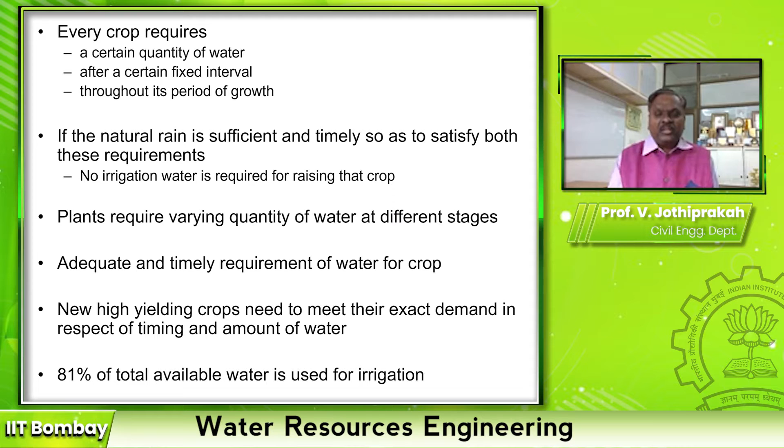We work towards this irrigation engineering because 81% of the total available water is used for irrigation. Especially in India also, it is around 80 to 82% supplied for irrigation. Why do we need to supply this in spite of having an average rainfall of 1150 mm per year? Because the natural rainfall is either insufficient temporarily or it's not happening at fixed intervals.

Depending upon the average annual rainfall, areas are climatologically classified as arid, semi-arid and humid. Our country has different classifications starting from arid to very wet, because we have annual rainfall varying from 200 mm to 11,000 mm. When the area receives annual rainfall less than 500 mm, we call that an arid region. When it is between 500 to 1100 mm, it is semi-arid.

At an average, our India comes under semi-arid condition. There are certain areas in our country which receive around 1400 mm — we call that subhumid. There are certain regions which receive up to 1700 mm — they are called humid regions. There are certain regions in the Western Ghats which receive around 2000 mm — that is wet region, and there are very high areas receiving more than 2000 mm — we call that very wet region.

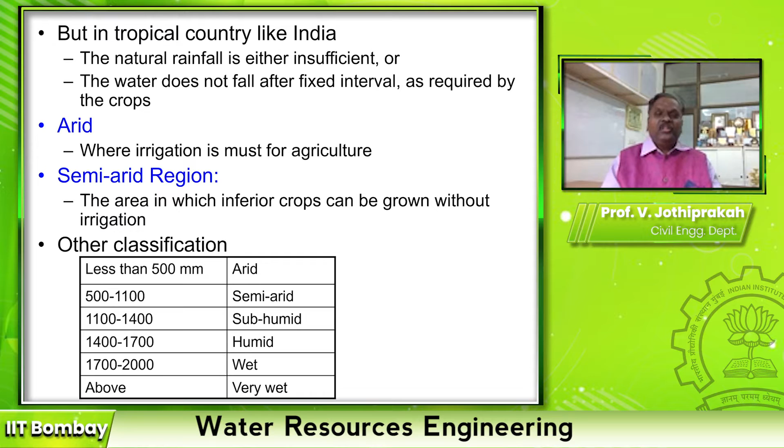So we used to supply irrigation water from arid to humid regions. But in our country, we supply irrigation water in all the classifications, because even in the western region where we receive rainfall up to 2000 mm, it happens only in the southwest monsoon. The remaining period of the year we need to irrigate. How much to be irrigated, and the frequency? If there is no irrigation...

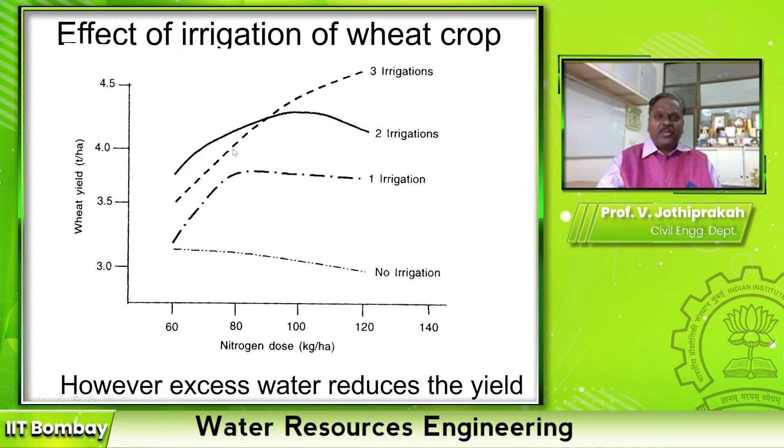This is the relationship between the yield of wheat crop and the nitrogen doses depending upon the number of irrigations. Even though nitrogen doses are available, if there is no irrigation, the yield is very less. When there is one irrigation, there is a good yield. When there is two, it's optimal. When you irrigate more with more nutrients, the yield may increase. If the nutrients are very less, the yield will be very less. So more water or less water, your yield will be less — you need to supply an appropriate quantity of water.

This is a picture from FAO. That quantity of water is called crop water requirement or water requirement of a crop. It is the total quantity and the way in which a crop requires water from the time it is sown to the time it is harvested — that is called the irrigation period.

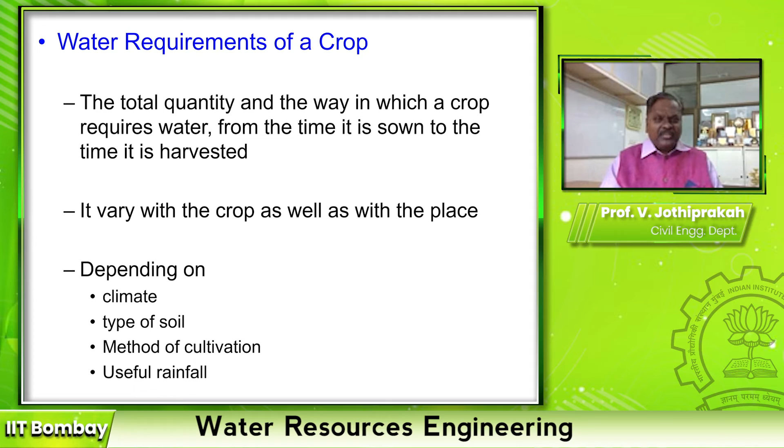This irrigation period varies with the crop as well as spatially from one place to another, depending upon the climate, the type of soil, method of cultivation, and useful rainfall.

So we have certain words which we need to remember in irrigation engineering. The first one is crop period. Crop period is the time period that elapsed from the instant of its sowing to the instant of its harvesting.

But the base period is the time between the first watering of a crop at the time of its sowing to its last watering before harvesting. So base period will always be less than crop period, or at most equal to it. That's why people say crop period is slightly more than the base period, but for all practical purposes, they are taken as one and the same.

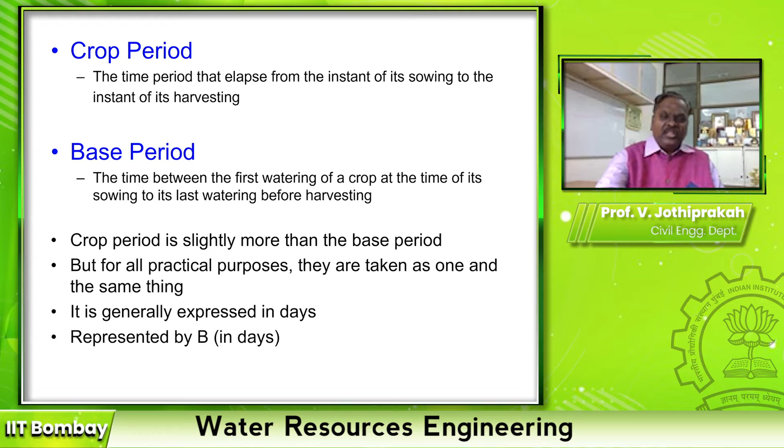It is generally expressed in days. So base period is expressed as B in irrigation engineering.

Delta is the total depth of water that should stand on the irrigated area if the total quantity supplied must stand above the surface without percolation. That means you are estimating evapotranspiration, right?

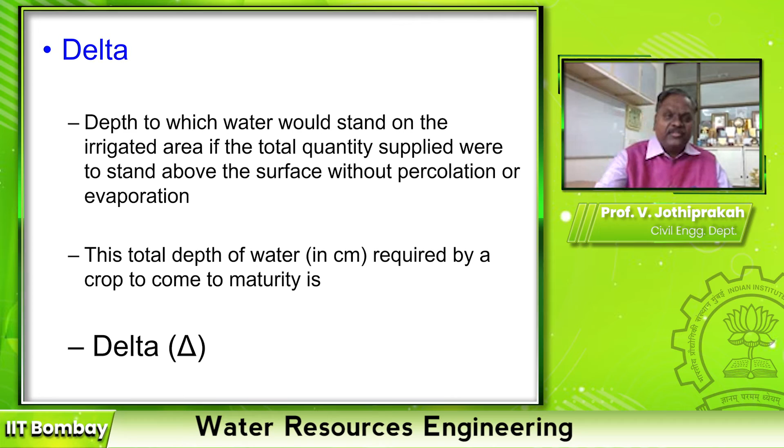That has the unit of centimeters per day. If that is the depth of water per day for the entire crop period, how much depth is required by the crop? You go on adding it throughout its base period, and it becomes centimeter depth, which is called delta. In other words, delta is the depth of water required by a crop throughout its base period for its metabolic growth without any deficiency.

For example, we have solved a problem. If rice requires about 10 centimeter depth of water at an average interval of 10 days, and the crop period is 120 days, find out the delta.

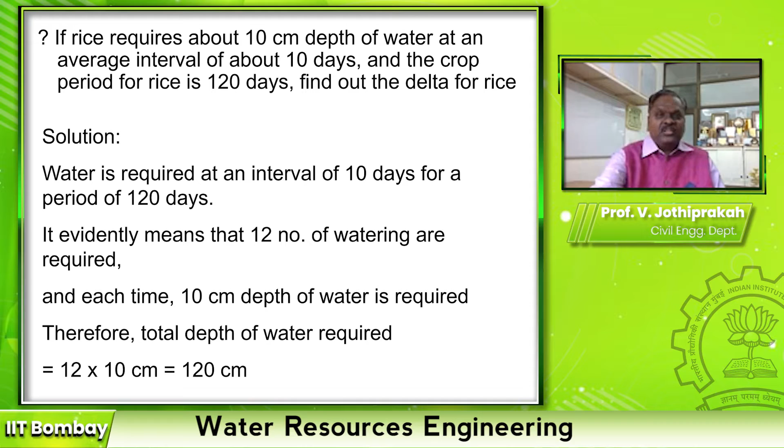So we are going to irrigate every 10 days, and each time we irrigate 10 centimeter depth of water. Out of 120 days, how many times do we irrigate? It is 12 times. So 10 centimeter into 12 waterings equals 120 centimeters. So the crop requires 120 centimeters of water throughout its crop period. This is how we estimate the delta and base period.

But this is a sample delta for different crops grown in India. Common sugarcane is a 1 year crop. For 1 year, the total depth of water to be supplied at the root zone is 90 centimeters. This is an average.

Similarly, rice, which is only a 3 to 5 month crop, is 120 centimeters. Tobacco, a 6-month crop, requires 75 centimeters. Garden fruits and cotton, also 6-month crops, have a delta of 50 centimeters. Vegetables, 4 to 6 months, are also 45 centimeters.

Wheat, 40 centimeters, which is 3 to 4 months. Barley, 30 centimeters. Maize, a dry crop, 25 centimeters. Fodder is 22.5. So the delta depends upon the type of crop.

Out of all these crops, rice and sugarcane are called irrigated wet crops. All other crops are called irrigated dry crops. That means for rice, we need to keep the water level above the ground level, so there is always a saturated condition. That's why it is called irrigated wet crop.

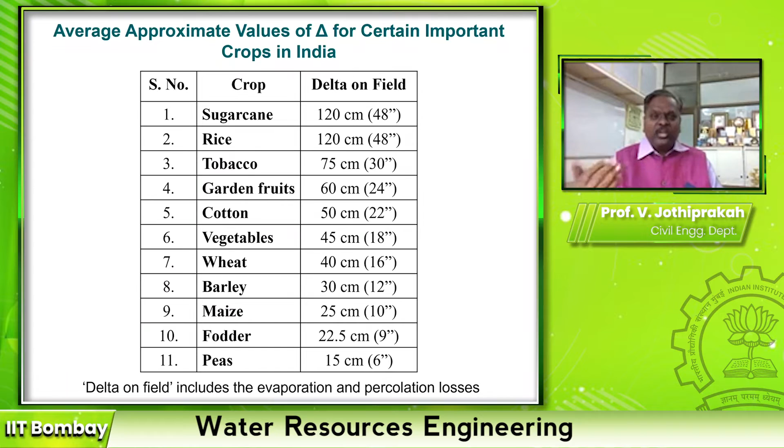Whereas for all other crops, once the soil is 100% saturated, you stop the irrigation. Then you allow a certain time period until the water in the soil is taken up by the plants, and then you irrigate again. So the frequency is more for other crops, whereas it is very less for rice crop.

Then if I want this much depth, how much water do I have to release from the dam? That's the major requirement of a water resources engineer. Okay, this much depth is required, then how much do I need to release? That is called duty.

So duty is the relationship between the volume of water and the area of the crop it matures. Duty is nothing but a unit discharge flowing for a time equal to the base period of the crop, called the base of the duty. That means duty is defined as the area irrigated per meter cube per second of discharge running for a base period of B. That means if I release 1 meter cube per second from the dam gates for a crop period B, how much area can I irrigate? That is called the duty.

For example, if water is flowing at a rate of 1 meter cube per second and runs continuously for B days of crop period, and matures or irrigates 200 hectares, then the duty of the water for that particular crop is defined as 200 hectares per cumec. That means 1 meter cube continuously supplied will mature 200 hectares. That is called the duty of the crop, and it varies from crop to crop.

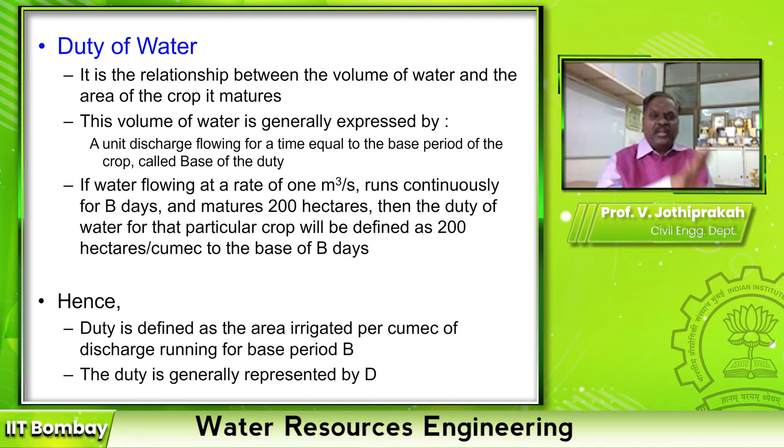There is a relationship between duty, delta and crop period. Let the crop base period be B days. Let 1 meter cube per second of water be applied to this crop on the field for B days. How much volume of water is applied for B days? Convert B from days into seconds since the rate is 1 meter cube per second. So the volume of water supplied along this crop period of B days is B into 24, converted into hours, then into 3600. That is the unit conversion. So the volume of water supplied from the dam is 86,400 B, where B is the days, in meter cube.

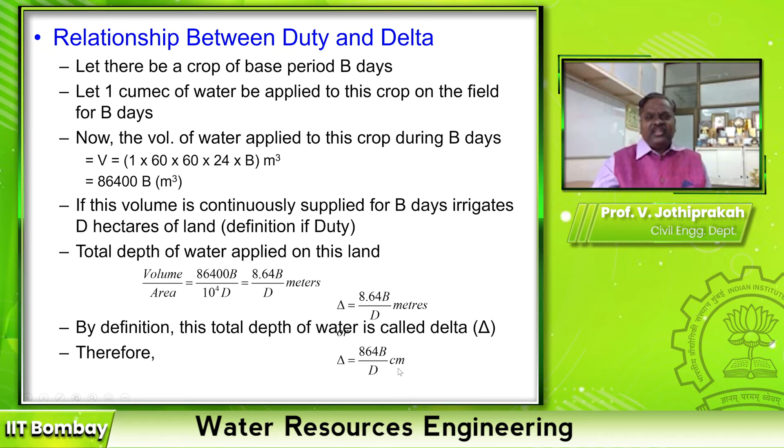If this volume is continuously supplied for B days, it irrigates D hectares of land. So the depth of water is equal to volume per area. D is in hectares, which equals D into 10,000 meter square. Volume is 86,400 B, and area is 10,000 into D. So volume per area is nothing but delta, which equals 8.64 B by D. By definition, this total depth of water is called delta. Therefore, delta is 8.64 B by D if delta is in meters, or 864 B by D if delta is in centimeters. This is the relationship between duty, delta and base period.

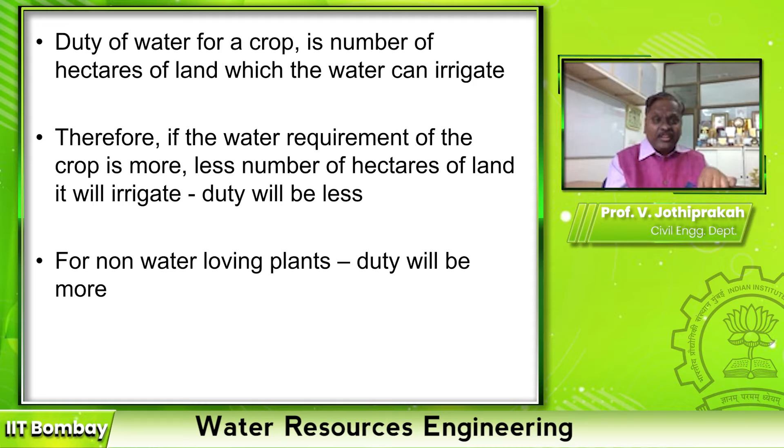Duty of water for a crop is the number of hectares of land which the water can irrigate. Therefore, if the water requirement of the crop is more, less land will be irrigated, so duty will be less. For non-water loving plants, duty will be more. That means for irrigated wet crops like paddy and wheat, with 1 meter cube per second you can irrigate only a small area. But for irrigated dry crops, for the same 1 meter cube per second, you can irrigate more area.

A simple problem: find the delta of a crop when its duty is 864 hectares per cumec. Please remember the unit for duty is hectare per cumec, or hectare per meter cube per second. Find the base period, find the delta if the base period of this crop is 120 days. So delta equals 864 B by D, where delta is in centimeters, B is in days, and D is in hectares per cumec. Substituting directly, you get delta as 120 centimeters.

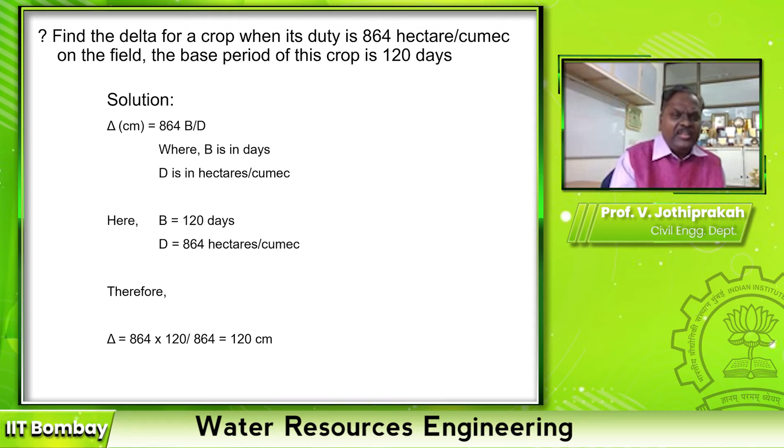As a water resource engineer, we are more concerned about this duty. That means you will receive an instruction to release a certain amount of meter cube per second from the dam. This duty depends upon various factors. Some of the factors are type of crop, whether it is irrigated dry crop or irrigated wet crop, and at what location. So duty will be less for a crop requiring more water, and vice versa.

Climate and season matter too. The same crop in the same place, during southwest monsoon, will require a certain amount of duty; during northeast monsoon, it will require a different duty; and when growing in summer, the duty will be different again. So duty includes water lost in evaporation and percolation, which vary with time, season and climate, and it is also a function of useful rainfall. This useful rainfall is different from observed rainfall as well as rainfall excess, which you have studied in precipitation.

Rainfall excess is nothing but the rainfall over and above the losses. But in this case, useful rainfall is: if there is X quantity of rainfall and you have only Y quantity of evapotranspiration, not all rainfall is considered by the crop for its direct growth. It will take only a certain percentage of rainfall for its metabolic growth, and that rainfall quantity is called useful rainfall.

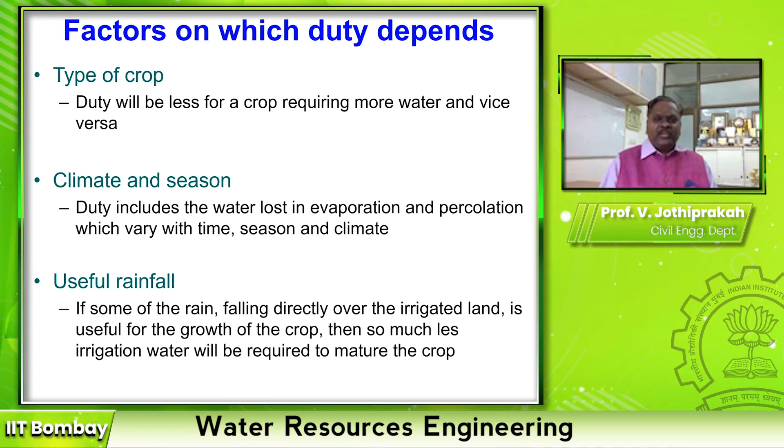If some of the rain falling directly over the irrigated land is useful for the growth of the crop, then so much less irrigation water will be required to mature the crop.

It also depends upon the type of soil, that is, the permeability of the soil under the irrigated crop. If the permeability is very high, you need to irrigate more. If the permeability is very less, water loss due to percolation will be less, so you have to irrigate less. So the type of soil governs the quantity of water to be supplied.

Then there's the efficiency of cultivation method. This is where human intervention helps improve the duty, meaning how efficiently the quantity of water supplied reaches the root zone. There are different methods of irrigation, like flooding method for wet crops, sprinkler method, and drip irrigation. These different methods help improve irrigation efficiency. The more the efficiency, the more the duty.

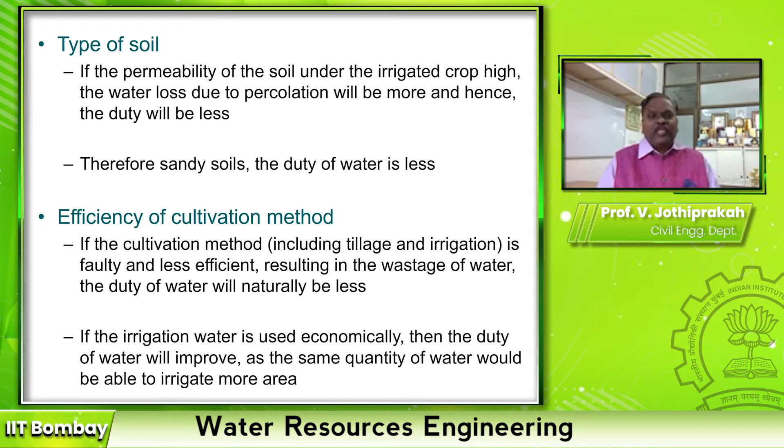So if the irrigation water is used economically, then the duty of the water will improve, meaning the same quantity of water can irrigate more area.

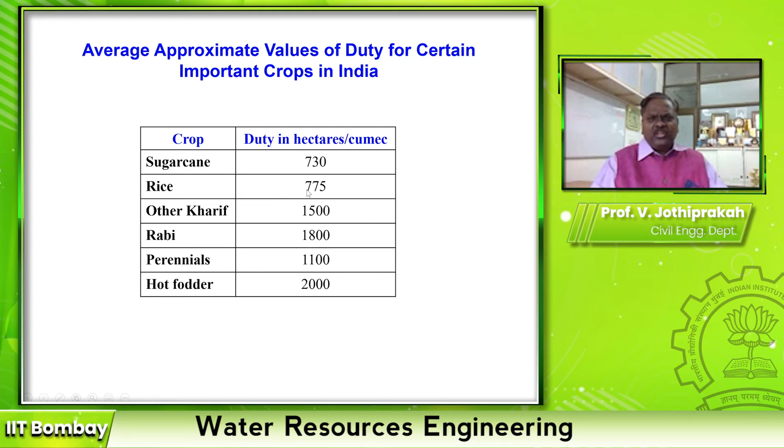The other kharif crops are all continuous annual crops.

Why is duty important? Because the design of the canal system, which distributes water from the dam to the crop, depends upon this duty. The canal is designed for a particular carrying capacity Q, and Q is nothing but the duty of the crop.

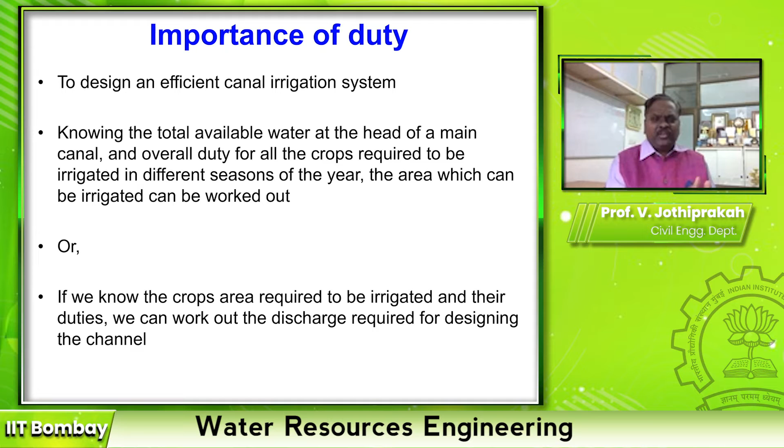Knowing the total available water at the head of the main canal and the overall duty for all crops required to be irrigated in different seasons, the area which can be irrigated can be worked out. Or if we know the crop area required to be irrigated and their duties, we can work out the discharge required for designing the channel.

These are some of the measures for improving the duty of water. As said, the main important factor is increasing the efficiency of cultivation or irrigation methods.

Some precautions: land used for cultivation should be as far as possible leveled, so that the same depth of water is applied everywhere in the field. The field should be properly plowed to the required depth, otherwise water will be stagnating.

If the root zone is very hard, water will not percolate. Whatever water you supply will stand on the ground and be lost to evaporation, while the roots receive no water.

Improved modern cultivation methods like sprinkler and drip irrigation supply water directly at the root zone, thereby reducing several losses.

Porous soil should be treated before sowing crops to reduce seepage. If the soil is very porous, like sandy soil, whatever water you supply will go deeper than the root zone and plants cannot take the water, so you have to treat the soil.

Alkaline soil should be properly leached before sowing, otherwise the alkaline soil may choke, or the alkaline material will be taken up by the plants.

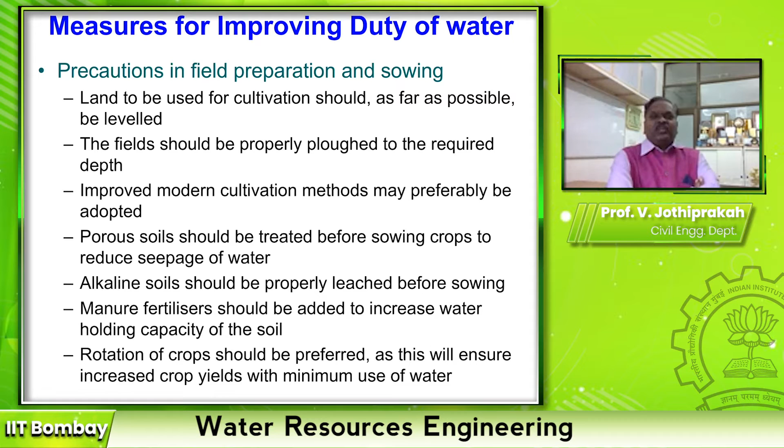Rotation of crops should be preferred, as this will ensure increased crop yield with minimum use of water. These are some measures to improve the duty of water.

There are certain precautions in handling irrigation supplies. The source of irrigation water should be situated within prescribed limits, meaning the dam should not be very far off from the command area.

The canal carrying supply should be lined to reduce seepage losses. Water courses may preferably be lined or made of RCC. The canal network consists of a dam, from which the main canal runs, then branch canals from the main canal, and from branch canals water is taken to the field.

If canals are all lined, then your conveyance losses will be less. Free flooding of fields should be avoided, but for paddy and wheat, you need to do this free flooding.

For all other irrigated dry crops, you can grow with different methods of irrigation like furrow, sprinkler, or drip irrigation. Or there is another method called subsurface irrigation, where you directly take the water to the root zone.

If canals are not lined, then two canals running side by side may be preferred. That will reduce the full supply level, thereby reducing the percolation losses. Altogether, the idea is to use the water economically.

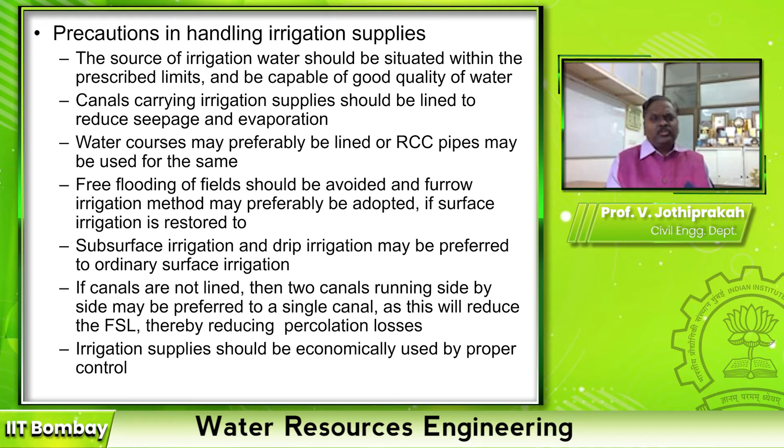Now we'll see what are the crops and crop seasons in Indian agriculture. More than 70% of our Indian population is directly or indirectly connected to agriculture. The major crops called staple food in India are rice and wheat. They are called irrigated wet crops.

Other irrigated dry crops are pulses, all dal which we eat, cotton, groundnut, jute, coffee, rubber, tea, sugar — they all come under irrigated dry crop.

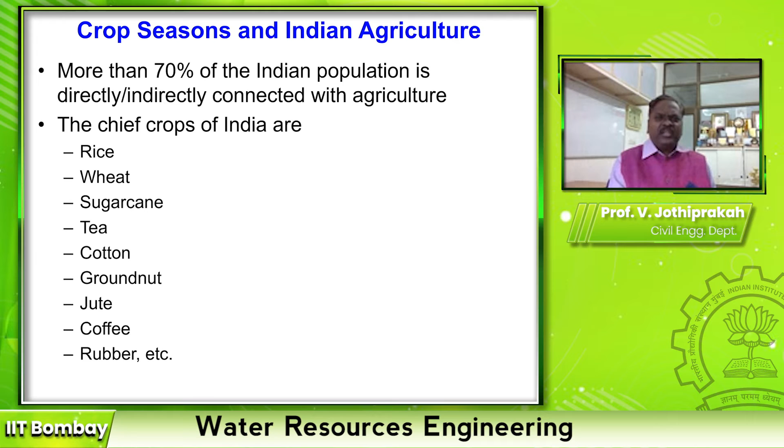I had given an assignment, if you remember during the first class, to write down the different crop seasons in different basins in India. Prior to construction of large dams, each reservoir and each river basin has its own name for its irrigation period.

For example, Samba, Kuruvai, Taladi — this is in Kaveri. Then Kar, Advanced Kar, Pishanam in Thamirabarani. Like that, each and every river basin has its own name.

But now we have only two crops, called Kharif and Rabi seasons. Because all irrigation starts in southwest monsoon, we call that the Kharif period. Northeast monsoon we call the Rabi period. So we have only two irrigation crops now in India, Kharif and Rabi, but still there are certain river basins which have their own crop periods.

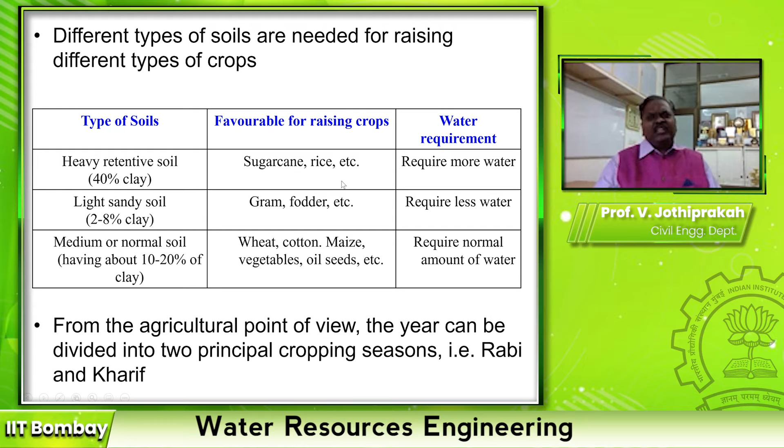So these are some of the types of soil which require different types of water retention, and we can say that the suitability of the soil determines the type of crop that can be grown.

Kharif starts from 1st April and ends on 30th September, the southwest monsoon period. Rabi starts from 1st October and ends on 31st March. These dates are not rigid, but nowadays we normally start only from June.

So June, July, August, September — these 4 months are the Kharif period. October, November, December and the next remaining months make up the 6-month Rabi period. The time may vary by 1 to 3 months on either side.

Sugarcane, which is an important cash crop, extends over both the Kharif and Rabi seasons. There are several reservoirs in India which start operating only from the month of June.

There are certain crops which require 6 months in the field. If the crop period is 6 months, they will extend into both Kharif and Rabi. 50% of their crop period will be in Kharif and 50% in Rabi season. This means they will be sown in June or July and will end in the month of December, so the area is occupied across both seasons.

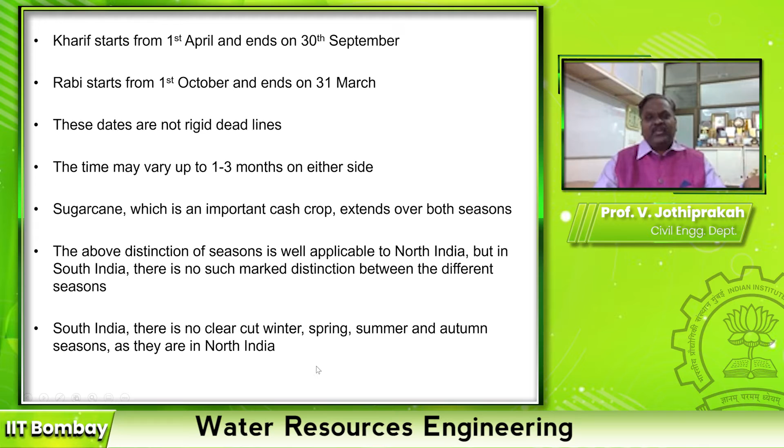The above distinction of seasons is well applicable to North India, but in South India there is no such marked distinction between different seasons — each river basin has its own name instead. You can ask some of the farmers what the season is called, or if you go to the irrigation engineering department of each state, you can find out the name of the irrigation crop period in that river basin.

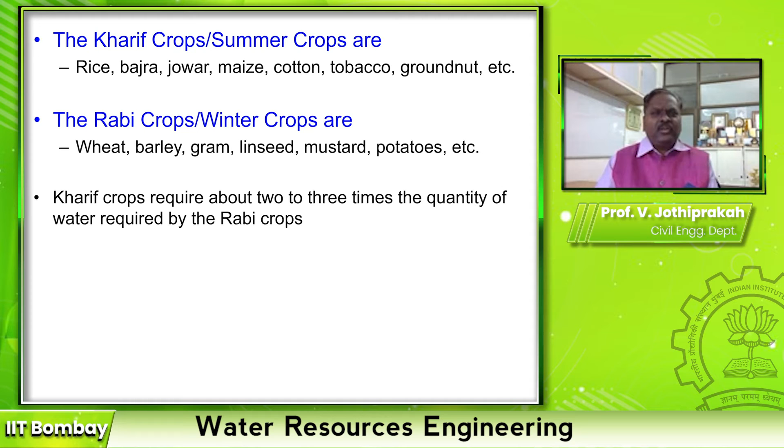These are some of the crops which are commonly grown. Rice and wheat are grown in both the Kharif and Rabi seasons, but the quantity of water required will be different. Kharif season is normally for irrigated wet crops, and Rabi season is generally for irrigated dry crops. Most of the pulses are grown during Rabi, though there are certain crops common to both seasons. Kharif crops require about 2 to 3 times the quantity of water as required by Rabi crops.

Now let us see what are the methods to improve irrigation efficiency — how efficiently we can send water from the dam to the field. From the dam, if water is supplied through the canal network, it will come to the field. So when I apply water in the field, that is called the application method, and depending upon the application method, there are different types of irrigation.

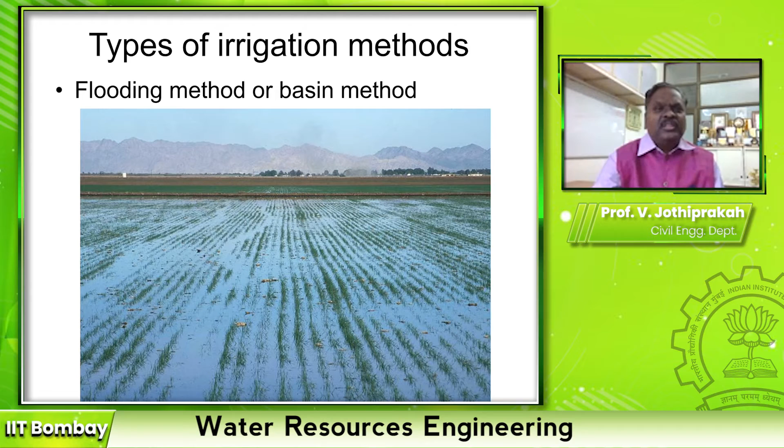The first one is called the flooding method. It's mainly for paddy and rice. We used to irrigate through this flooding method.

This is called the furrow method. Most of the pulses, chilies, sugarcane, and maize are grown using the furrow method.

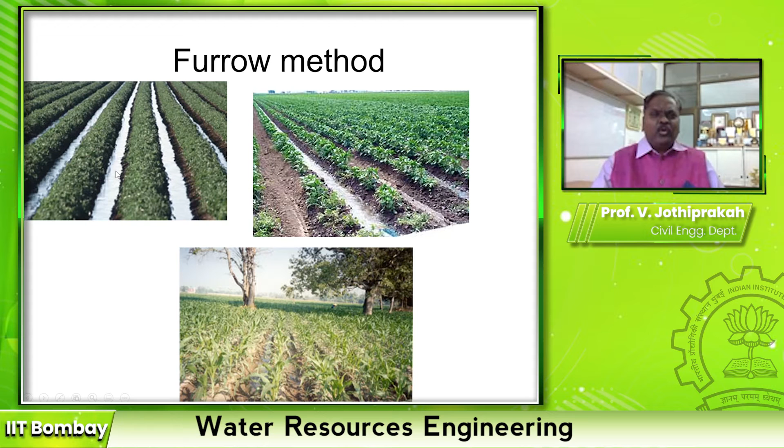That means there is a long, small canal, and water is allowed to flow in these small canals, with a bund used to irrigate the crops. This method has slightly more efficiency than the flooding method.

Then the next method is sprinkler irrigation. Sprinkler irrigation is like a substitute for rain. It sprays water like rain, from a single sprinkler to a group of sprinklers.

The sprinkler rain intensity has to be designed. This intensity is a function of the type of crop and the soil characteristics.

I think you know what infiltration rate is. At any cost, this sprinkler rate should not be more than the basic infiltration rate, because if it is more, once the soil is saturated, it will start overflowing.

So in sprinkler irrigation, there is no flooding or surface runoff created from the field. It will sprinkle like rain until the soil gets saturated. That is field capacity.

Second is crop requirement. If the crop requires a rainfall intensity less than the infiltration rate of the soil, I design it for that. So the sprinkler rate is a function of both the type of crop and soil characteristics.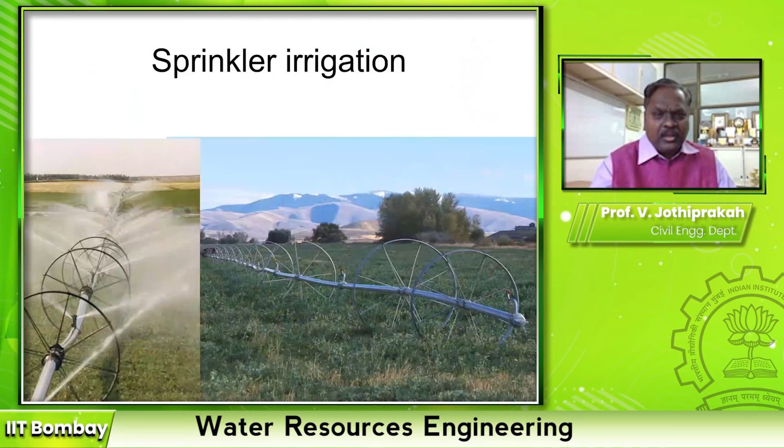This is for irrigated dry crops. The previous one is for fodder crops. This is what nowadays are automated sprinkler irrigation methods for cotton, orchards, and gardens.

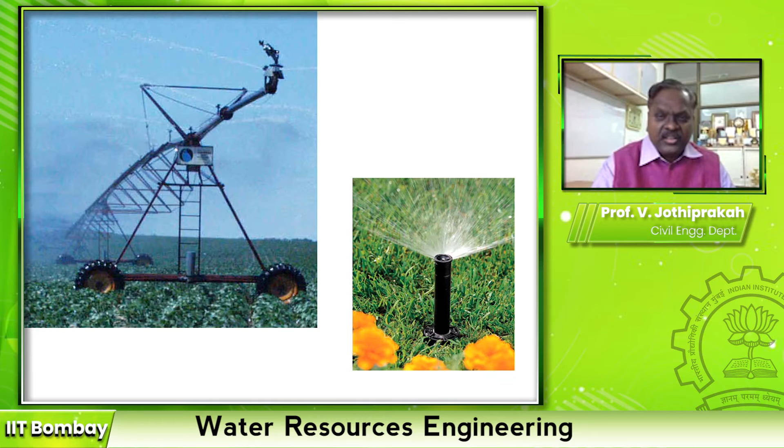This is the close-up view of a sprinkler gun. There will be a jet coming out of a small nozzle which is flipped, splashing the water. Irrigation efficiency-

This sprinkler has an irrigation efficiency of 90%. That means if I supply 10 centimeters of water, 9 centimeters reaches the crop root zone. 90% is the irrigation efficiency.

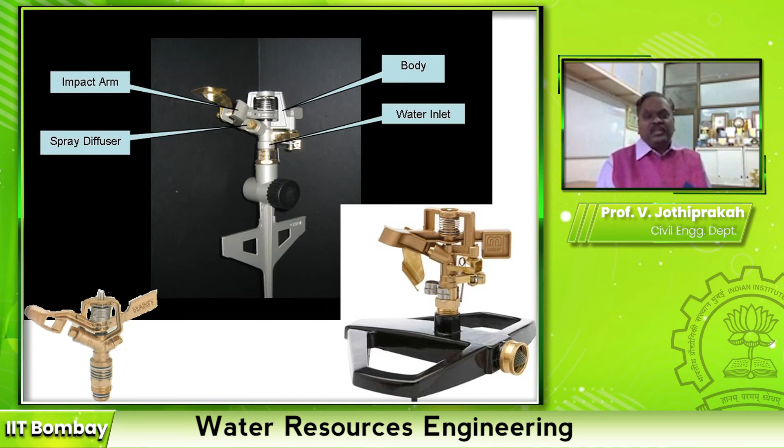There is another method called drip irrigation, which delivers the required quantity of water drop by drop at the root zone, with a very high irrigation efficiency of 95% to 98%, but the initial cost is higher.

So as the method of irrigation advances, the cost also increases, starting from basin, then furrow.

Furrow has to be constructed every year. Its efficiency is better than the basin method. Then sprinkler irrigation requires equipment that is costlier, but it is more efficient than the furrow method.

Drip irrigation is much more efficient than sprinkler irrigation, but you need to invest a lot. All methods, sprinkler can be used for all crops, but drip irrigation, nowadays, is used for-

orchards, row crops, and sugarcane. Now, because of its expense, it's very difficult to use it for all other crops.

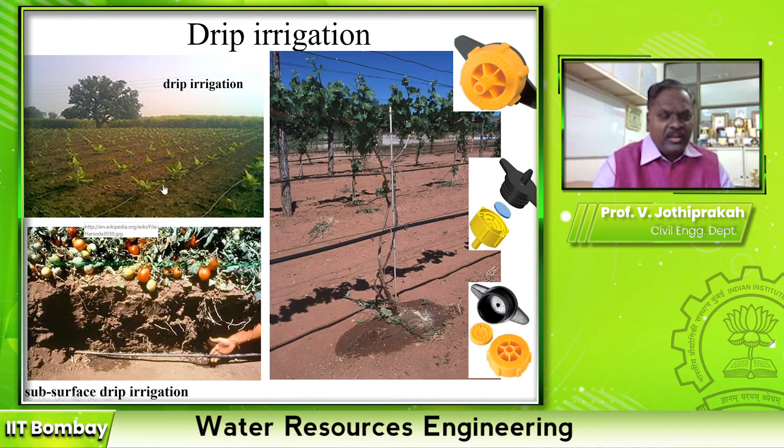So this is mulching to reduce evaporation from the crop root zone, in a conventional drip irrigation system. This is the drip pipeline. We will see this is called the emitter. Every pipe will have an emitter.

It is not just a hole. The water moves around a circular path, so that the head of water and the quantity of water supplied at each plant is uniform.

There will be a main pipe, then sublines, and then emitters. Emitters are the small holes with a circular movement of water. This portion is fixed into the pipe.

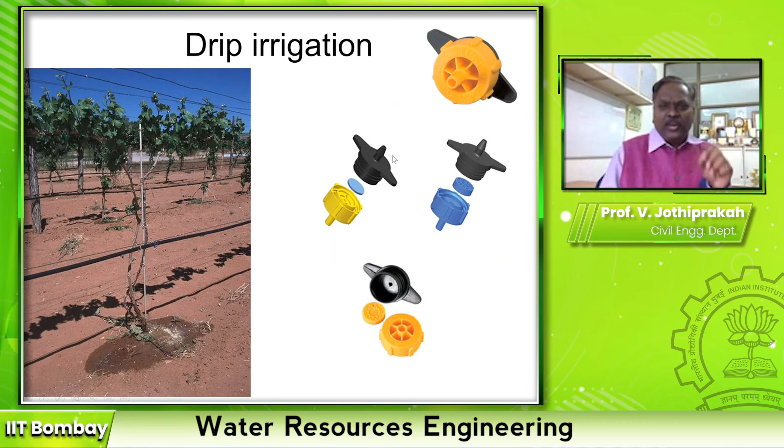Water will come out of this small nozzle drop by drop. Thereby, the head of water available for each crop is uniform throughout the period, throughout the crops.

That is called a dripper or emitter. So thereby you reduce losses, and there are several advantages to using this drip irrigation.

First advantage is there is no weed growth because water is supplied only to the crop, so you reduce the cost of weeding. First and foremost is highest irrigation efficiency. The product will be much higher because you are supplying water without deficiency, with efficient utilization of water. The one disadvantage is the high initial cost, but nowadays governments are giving a lot of subsidy for farmers to implement this.

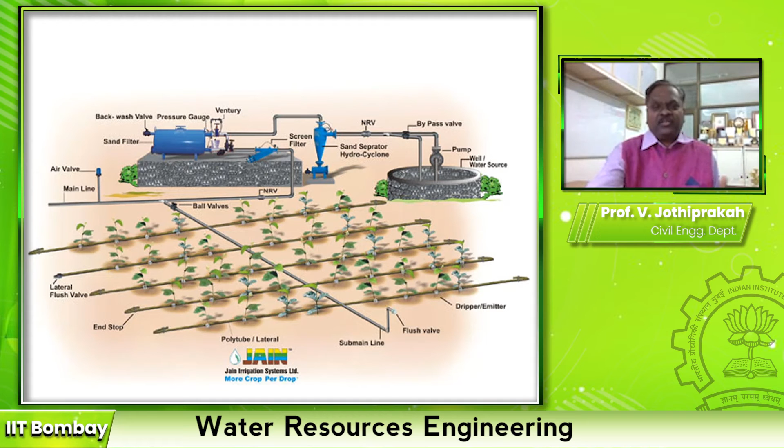So this is the type of crop, but how much water we need to supply, we have seen during our earlier period, this is called crop water requirement or evapotranspiration. There are two types of evapotranspiration. First is reference crop evapotranspiration, which we estimate as a function of meteorological parameters, that is ET naught, then multiply it with the crop coefficient.

Crop coefficient is a function of type of crop and stage of the crop. Stage means the level at which it has grown. ET naught is nothing but the reference crop, well watered, usually alfalfa or grass. Crop coefficient varies from crop to crop, which we estimate using lysimeters.

Once I know the crop coefficient, for every day I can multiply that with the reference crop evapotranspiration estimated using meteorological parameters. Then I get the crop evapotranspiration, which is called consumptive use. This crop evapotranspiration minus effective rainfall gives you the net irrigation requirement.

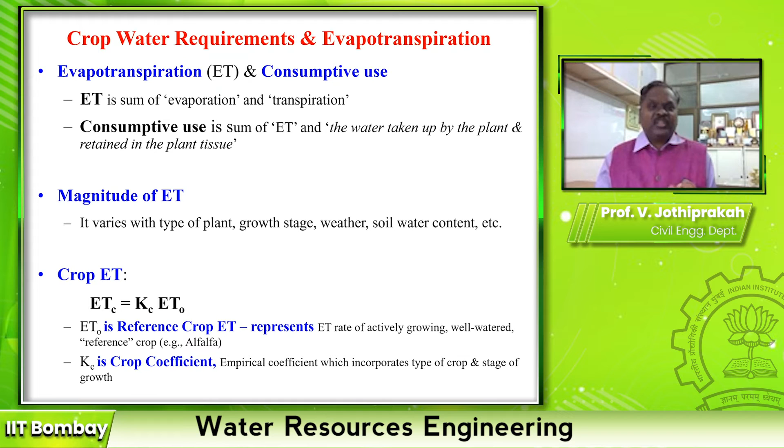Net irrigation requirement with application efficiency is called field irrigation requirement. This field irrigation requirement with conveyance loss is the water to be released from the dam, called gross irrigation requirement. So we have water at root zone, that is crop water requirement, minus effective rainfall is the net irrigation requirement at field level, then including conveyance loss, that is gross irrigation requirement.

So this covers crop duration and growth stages. Every crop, even rice or wheat, is 120 to 150 days. It has different stages: first is nursery, then development stages, mid-season, and then maturing season. The crop coefficient varies from one stage to another stage.

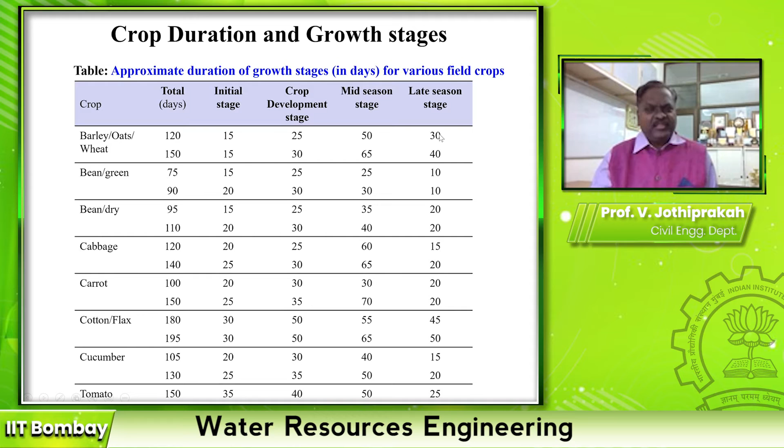This is just to give you an example, like for wheat and rice. 15 days, 25 days - in rice, 15 days is nursery, then 15 to 25 days in vegetative growth, then mid-season, and then late season, that is the maturing stage. This is the crop coefficient applicable throughout the world. So this is about crop water requirement.

Now we will see what is irrigation scheduling. I told about net irrigation requirement, field irrigation requirement, and gross irrigation requirement. Once I supply the water for irrigation, what is the next time interval I need to supply? That depends upon my application method, type of crop I am growing, variety of crop, and location. This governs the frequency of irrigation, and that frequency is called irrigation scheduling.

Now we will see one by one. Irrigation timing or irrigation frequency depends upon the time interval in which I need to water the plants. Irrigation frequency and irrigation interval are closely related. Irrigation frequency is the number of irrigations required for a crop. Higher frequency of irrigation means the interval between one irrigation and another is very small. Higher frequency of irrigation keeps the surface soil moist for longer periods, which leads to higher evapotranspiration loss. So irrigation frequency should be as low as possible to avoid water wastage.

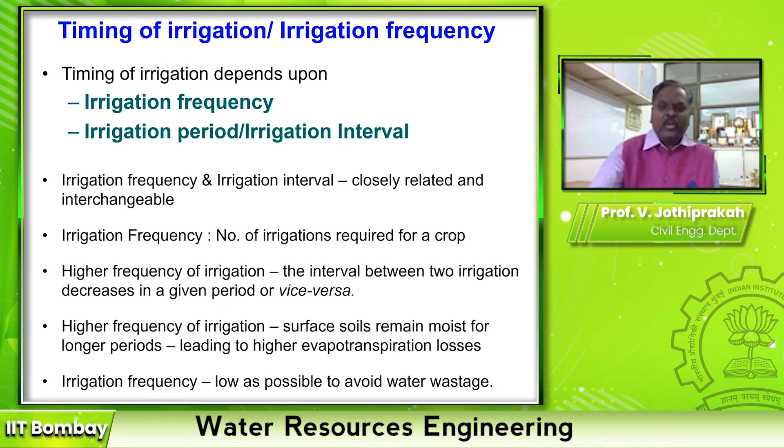Then my frequency is also affected by the climate.

During monsoon period, my irrigation frequency is very less because of effective rainfall. Whereas in summer season, my frequency is higher, so I have to irrigate frequently.

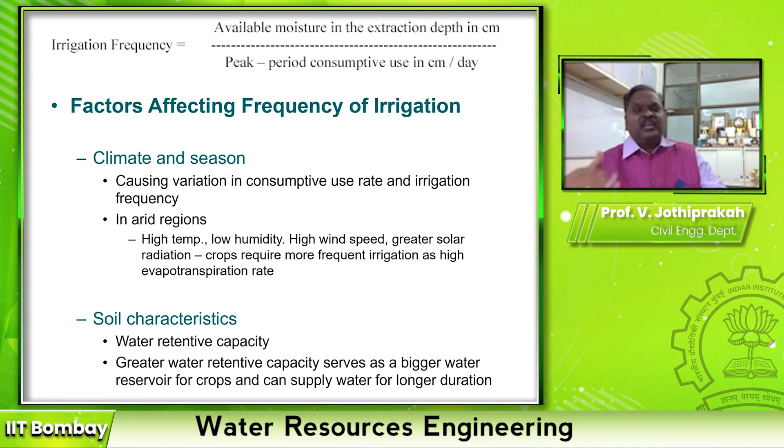Then the soil characteristics. If the soil has less permeability, that means water is retained in the soil for a longer period, then my irrigation frequency is less.

Otherwise, I have to irrigate frequently. Then the crop characteristics. Crops having higher consumptive rate consume soil water quickly than crops which require less water. Crops like vegetables, onion, tobacco, sugar beet require more irrigation than crops like wheat, bajra, mustard, maize. Even among irrigated dry crops, some take more water depending on the type of crop.

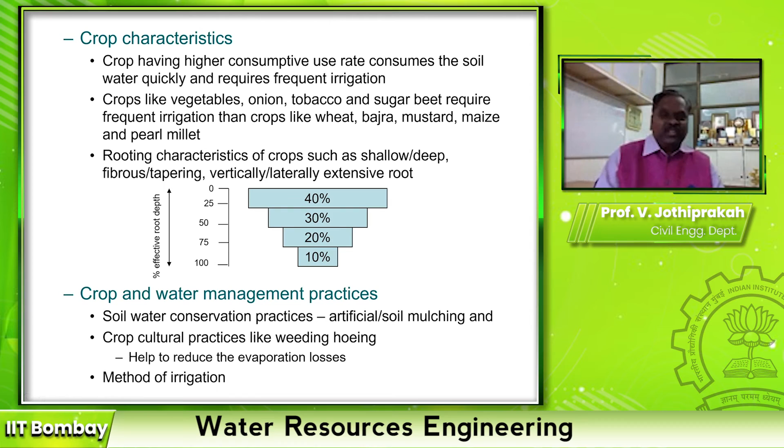So let us see some terminologies. Irrigation depth, delta, is the net depth of water normally needed to be applied to the crops during each irrigation. In practice, it is approximately equal to readily available moisture. So the total depth of irrigation when I go on adding is delta, and how much delta I irrigate at each irrigation is called readily available moisture.

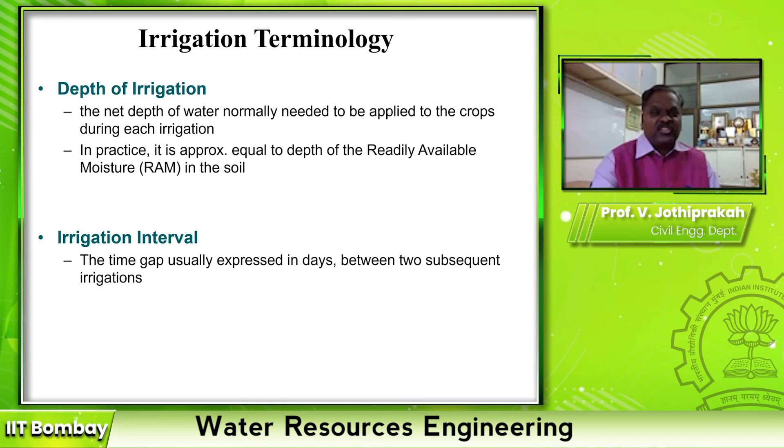Irrigation interval is the time gap expressed in days between subsequent irrigations. Irrigation period is usually expressed in days, and is the time that can be allowed for applying one irrigation to a given design crop during peak consumptive use, as a function of peak period consumptive use rate.

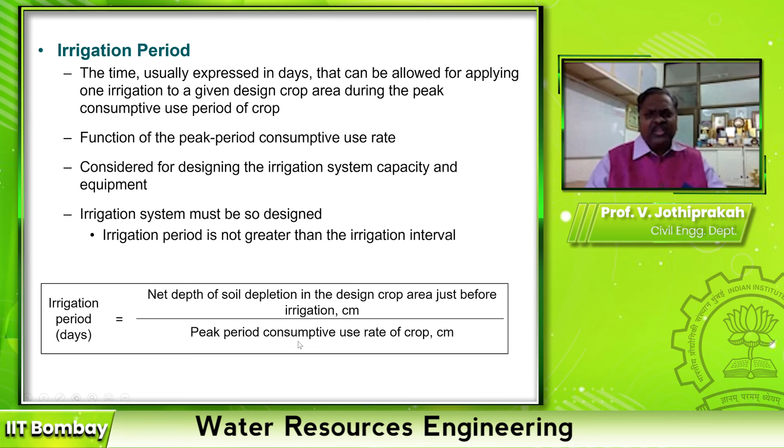This irrigation period is considered in the design of the irrigation system, capacity, and equipment. So irrigation period in number of days equals the depth of soil depletion by the crop divided by peak period consumptive use. This is what we call irrigation interval and irrigation period.

In irrigation scheduling, the irrigation period should be less than the irrigation interval. This is because if the period is not smaller, before the latter parts of the area are irrigated, the earlier irrigated area will need fresh irrigation. That means we need to keep the moisture level, not at zero.

There are three different limits of crop moisture. One is called field saturation capacity, meaning the soil pores are completely filled with water. That is the field capacity.

As the plant extracts water, the moisture content goes on decreasing. After a certain moisture content, the plants cannot extract water from the soil anymore. That is called the wilting point, specifically the temporary wilting point. Even though there is moisture in the soil, the plant cannot extract it at this point.

So we need to irrigate before that temporary wilting point. If you don't irrigate, the moisture content still goes down and the plants cannot extract water even if you irrigate again. That level is called the permanent wilting point, meaning the plants are dying. Even if you irrigate again, the soil will not take up water. You need to irrigate before the permanent wilting point, at the temporary wilting point of a crop.

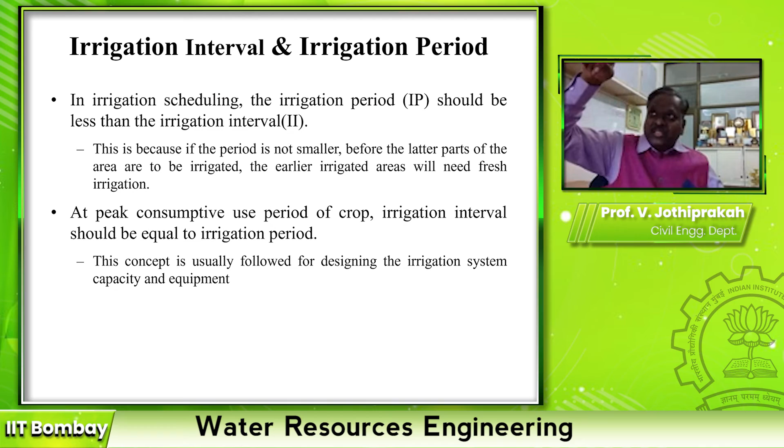So it's like a sawtooth pattern. In one irrigation, it becomes field capacity, then goes on reducing, and after reaching the management allowed depletion, you irrigate again. That is called irrigation frequency.

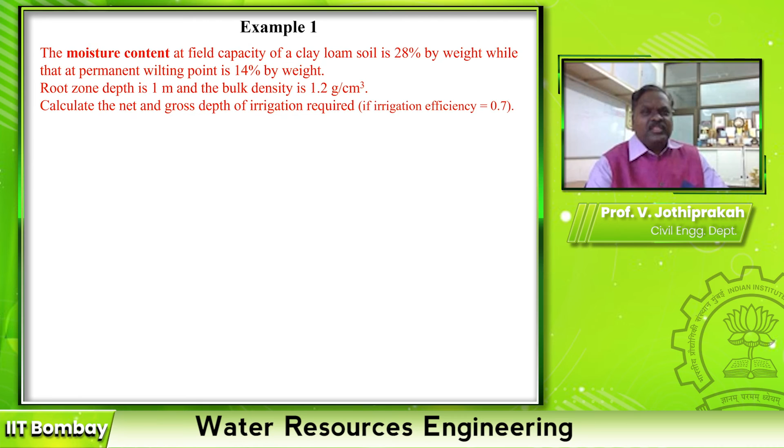So just for understanding, I have given a small problem. The moisture content at field capacity of a clay loam soil is 28% by weight, while that at permanent wilting point is 14% by weight. The root zone depth is 1 meter, and bulk density of the soil is 1.2 grams per centimeter cube. Calculate the net and gross depth if irrigation efficiency is 0.7.

Field capacity is 28%, permanent wilting point is 14%. Here I am allowing up to the permanent wilting point, though normally we will never do this in practice. Before the permanent wilting point, there is a temporary wilting point, and before that is the management allowed depletion.

That means this percentage will be very, very less, but for calculation purpose, I was doing it. So available soil moisture at field capacity is 28%. Now permanent wilting point is 14%, so 14% is the available moisture in the field.

What is the bulk density? It's 1.2 gram per centimeter cube. Root zone depth is 1 meter. Now equivalent depth of water: this is in percentage, and equivalent depth is nothing but available moisture content into specific weight of the soil and root zone depth. Here 14%, that is 0.14, and specific weight is the specific gravity of water. 1.2 is the specific gravity, because bulk density is 1.2 divided by 1 gram per cc of water, into root zone depth which is 1 meter.

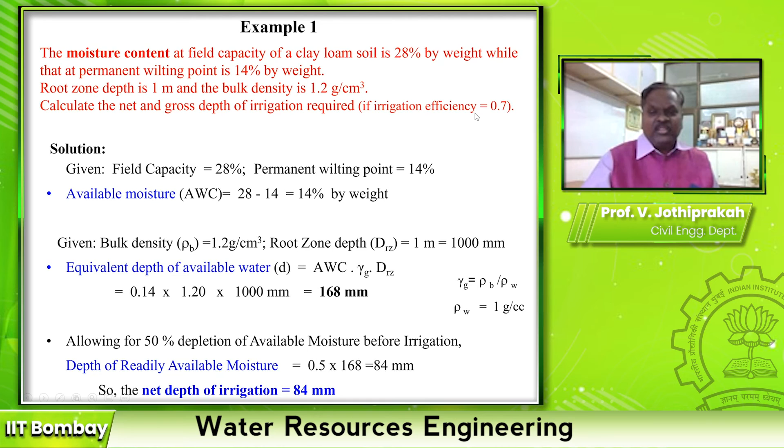The net irrigation efficiency: 84 mm divided by 0.7 gives 120 mm. So the volume of water I need to irrigate is 1200 meter cube per hectare.

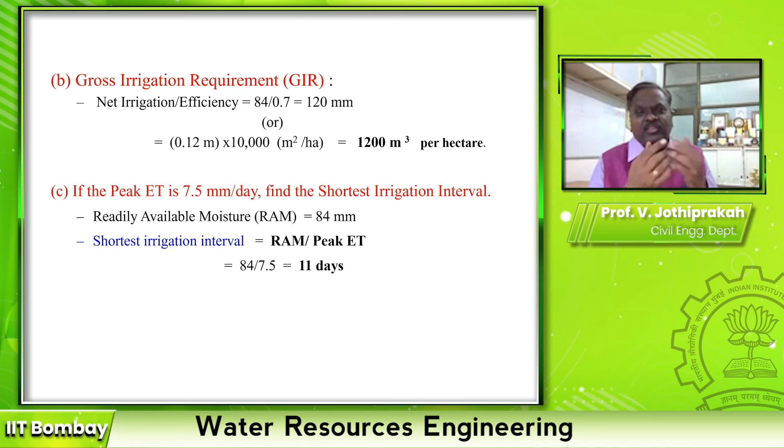If the peak evapotranspiration is another question: if the peak evapotranspiration is 7.5 mm per day, the shortest irrigation interval is found from the readily available moisture, which is 84 mm. That much I need to irrigate within how many days? If the peak requirement is 7.5 mm per day, so every 11 days I need to irrigate to achieve this 84 mm depth of water for this crop period. Okay, so this is an example.

Then comes how to improve the irrigation efficiency. We have seen different methods of irrigation, and how to supply the quantity of water through irrigation scheduling. Then how to estimate whether the supplied water is efficiently used or not — that is called irrigation efficiency.

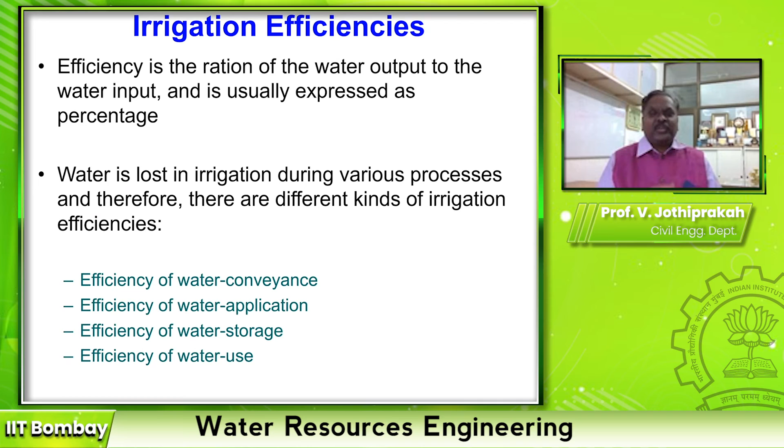Irrigation efficiency is the ratio of the water output to the water input, and it is usually expressed as a percentage, because water is lost during irrigation in various processes, and therefore the crop may not take the full quantity of water that was supplied. There are certain losses like conveyance loss, application loss, water storage loss, and water use loss. You need to estimate each of these efficiencies separately.

So efficiency of water conveyance is the water loss during conveyance in the canal. It is the ratio of water delivered to the field from the outlet point of the channel to the water pumped into the channel. If it is a reservoir, it is the water released from the reservoir gate compared to how much water has reached the canal or field inlet. It is represented by conveyance loss: water delivered divided by water diverted, i.e., water delivered to the farm divided by water diverted from the reservoir.

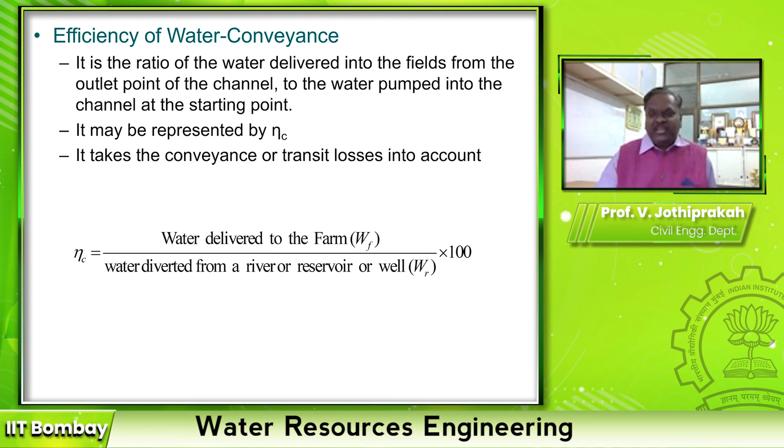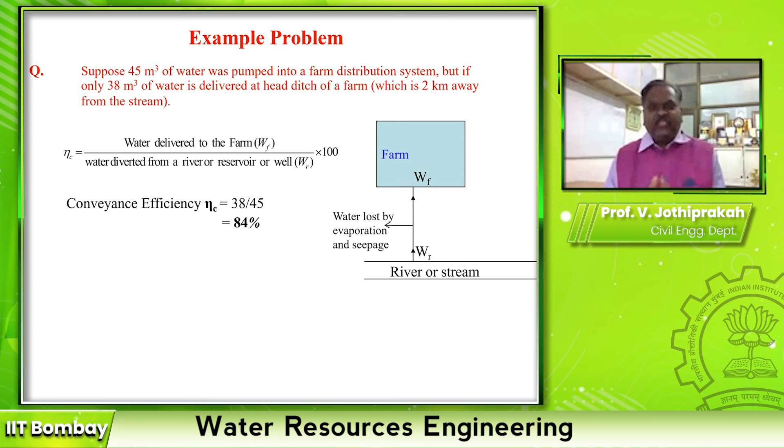For example, suppose 45 meter cube of water was pumped into a farm distribution system, but only 38 meter cube of water is delivered at the head ditch of the farm, which is 2 kilometers away. What is the conveyance loss? The volume of water reached at my farm is 38 meter cube, but 45 meter cube was lifted from the source. So 84% is the conveyance efficiency — not loss, that is the efficiency. The loss is 7 meter cube, so the loss is 7 by 45, which is 16%. So 84% is the efficiency and 16% is the loss.

Then there is water application efficiency, which depends upon the method of irrigation. It is the ratio of the quantity of water stored in the root zone of the crop to the quantity actually diverted into the field — how much water comes to my field and how much I have stored in the root zone of the crop.

If my method of application is different, then a different depth of water is stored, and that is why people say it is a function of runoff and percolation. That means if I use flooding method, there will be more runoff and more percolation, whereas in sprinkler irrigation there is very little surface runoff and very little percolation, because I don't supply more than the infiltration rate and soil characteristics allow. In drip irrigation, there is absolutely no runoff and almost no percolation, because water is supplied directly at the root zone.

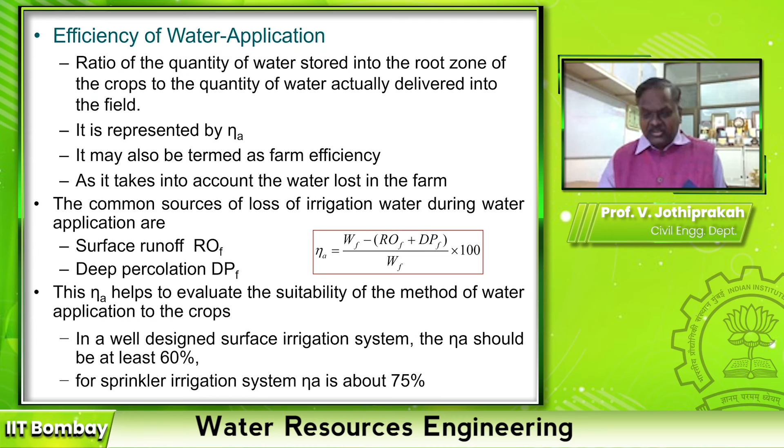In a well-designed surface irrigation system, the application efficiency, that is in furrow method, is around 60%, whereas in sprinkler irrigation system, it is around 75%, and in drip irrigation method, it is 95%. The application efficiency is nothing but the volume of water supplied at the root zone depth to the volume of water supplied at the field level.

For example, a delivery of 10 meter cube per second to a 32 hectare farm is continued for 4 hours. The tail water is 0.27 meter cube per second. Soil probing after irrigation scheduling shows that 30 centimeter of water has been stored in the root zone. Compute the application efficiency. So what do we do first?

First we have to estimate how much water is delivered. It is 10 meter cube per second for 4 hours, multiplied with 4 into 3600 converting the unit. So the volume of water supplied is 1,44,000 meter cube.

And how much is stored in the root zone? By soil probing, soil tensiometer, it shows that 30 centimeter of water has been stored in the root zone. So water stored in the root zone is 0.3 meter. The area is 32 hectares, which is 10,000 meter square. So 0.3 into 32 into 10,000 equals 96,000. So you supplied 1,44,000 meter cube, but water stored is only 96,000 meter cube.

Then what is the application efficiency? It is 96,000 meter cube divided by 1,44,000 meter cube, that is water stored in the root zone divided by water delivered to the farm. So the application efficiency in this case is 66.7%.

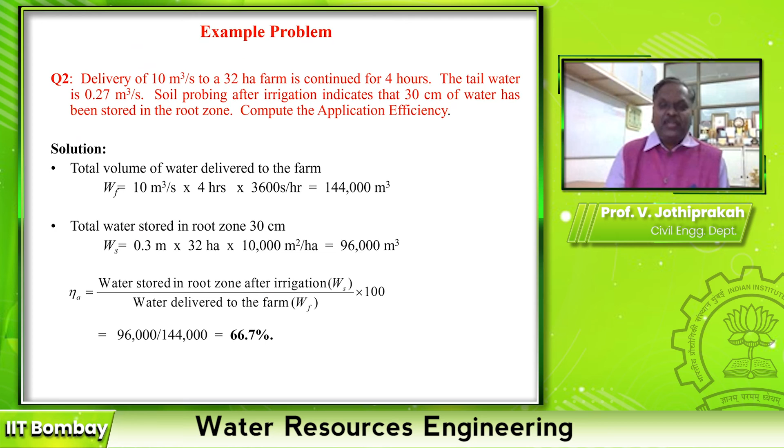Now what is the total efficiency? It is the multiplication of my conveyance efficiency and application efficiency. That is called water use efficiency.

There is one more efficiency, called water storage efficiency. That means it is the ratio of water stored in the root zone during irrigation to the water needed in the root zone prior to irrigation. That's part and parcel of the exact method of irrigation at the root zone. It is represented by sigma s, eta s. That means the total water use is the multiplication of all the efficiencies.

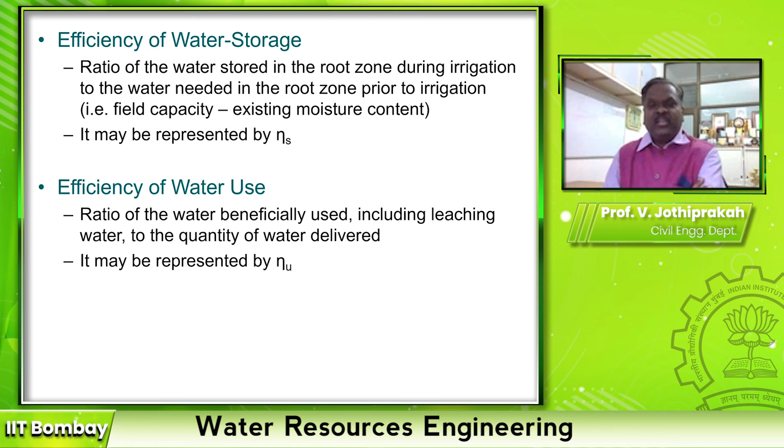I have given a problem where you can compute different types of efficiencies. It's a large scale irrigation district, and its source, the storage reservoir, is 60 kilometers away. He wants to irrigate 65 hectares, that is the area of the land. The crop water requirement is estimated as 50 mm.

Due to expected non-uniformity of application, he has to apply 55 mm, then only he will reach 50 mm at the root zone. The spray and wind drift losses is 8%, so this also we should include in the depth of water. Distribution system losses is 15%, and storage reservoir to entrance to the district conveyance losses is 45%. Compute the applicable irrigation efficiencies and volume of water which must be released from the storage reservoir to meet the farmers' crop water requirement.

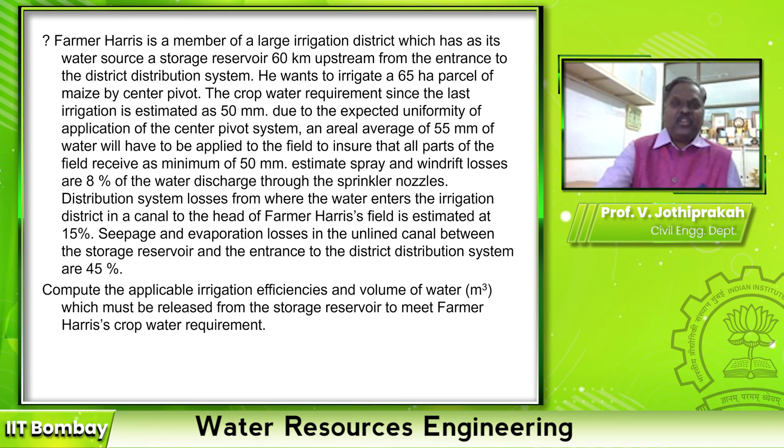So first we have to estimate what is the volume of water required at the root zone. 50 mm is required at the root zone for an area of 65 hectares. With unit conversion, the volume of water required at the root zone is 32,500 meter cube.

Application efficiency: he wants 50 mm at the root, but he has to apply 55 mm to take care of deep percolation losses. So how much does he have to apply? He has to apply 35,750 meter cube.

But he has a drift and spray loss from his sprinkler irrigation. So that means loss volume of water - if he has 8% loss, how much water does he have to spray from the sprinkler? That is volume of water at the application surface divided by the volume of water sprayed, that is by efficiency. So 35,750 divided by 1 minus 0.08, that means 38,859 he has to spray from his device.

Then what is the distribution system? He has said that there is 15% loss in the distribution system, that is in the pipes, pumping, all these things. Then the distribution system, at the starting of the distribution system, the volume of water required is 45,716. How do you get this?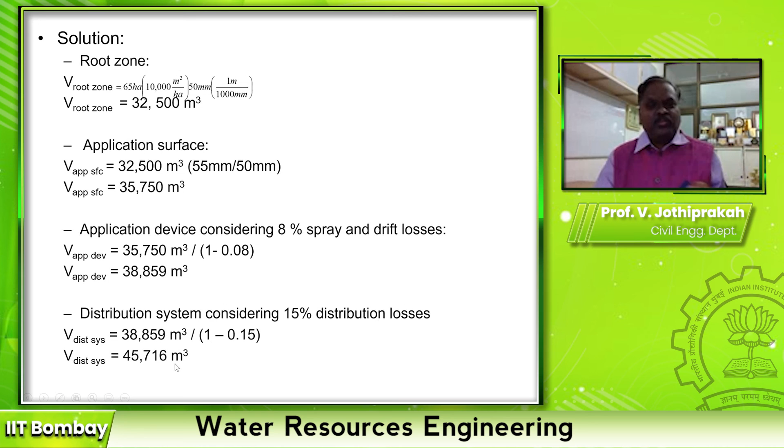This is how much water comes from the sprinkler spray to how much water you have supplied at the starting of the pipe. It's 15% losses, so 38,859 divided by 0.85. Then 45,716 meter cube is the volume that has to be pumped from the starting of the pipe. But how much is the loss in the conveyance?

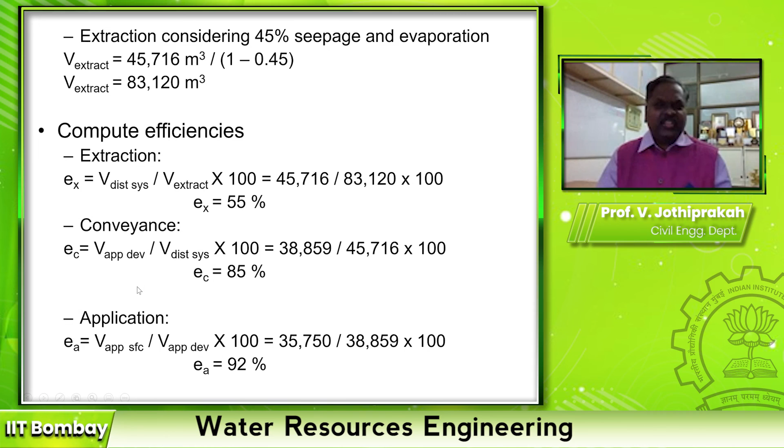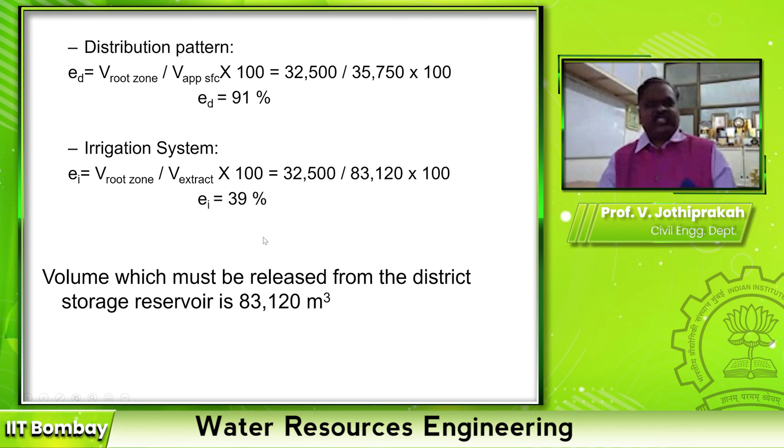45,716 is needed at the distribution system with 45% seepage and evaporation conveyance losses. Volume of water extracted from the reservoir is 83,120 meter cube. Then you can estimate the efficiency of extraction - that means conveyance loss, and then application losses, distribution losses, overall irrigation system efficiency. So overall he supplied 32,500 at the root zone but extracted 83,000. That means his irrigation system efficiency is only 39%. So this is how we estimate efficiency at different locations.

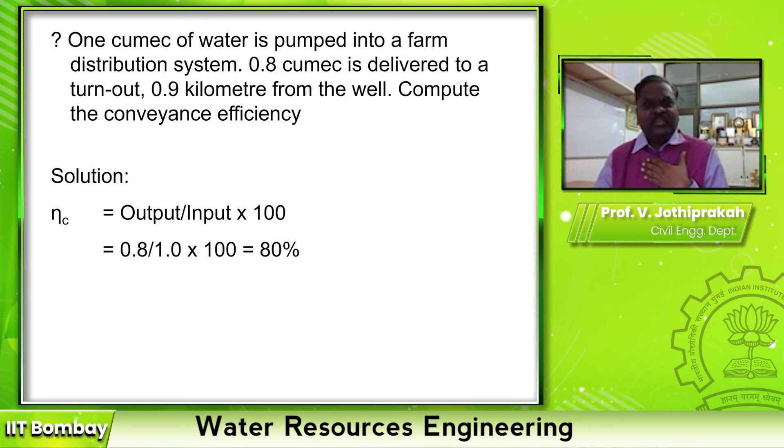This is another small problem. 1 meter cube per second of water put into the farm distribution system. 0.8 meter cube per second is delivered to a turnout 0.9 kilometer from the well. Compute the conveyance efficiency: output by input. Output is 0.8 cubic meter per second received, but how much have you pumped? You have pumped 1 meter cube per second. So efficiency is 80%. Simple questions, right?

These are all some of the definitions which you will come across when working in the irrigation engineering department. Gross command area is the total area bounded within the irrigation boundary of a project, which can be economically irrigated without considering the limitation of quantity of water. That means we can say it is the designated area for irrigation.

Cultivable command area is part of gross command area where cultivation is possible. So the maximum cultivable command area is equal to gross command area, because in a particular year, depending upon the volume of water available in the reservoir, and then farmers' availability, machinery availability, certain amount of area only is cultivable, and that area is called cultivable command area. All of this cultivable command area may not be sown or cultivated at a time. Pastures, fallow lands which can be made cultivable are included. Uncultivable populated areas including ponds, reserved forests are all excluded from cultivable command area, but they are included in gross command area.

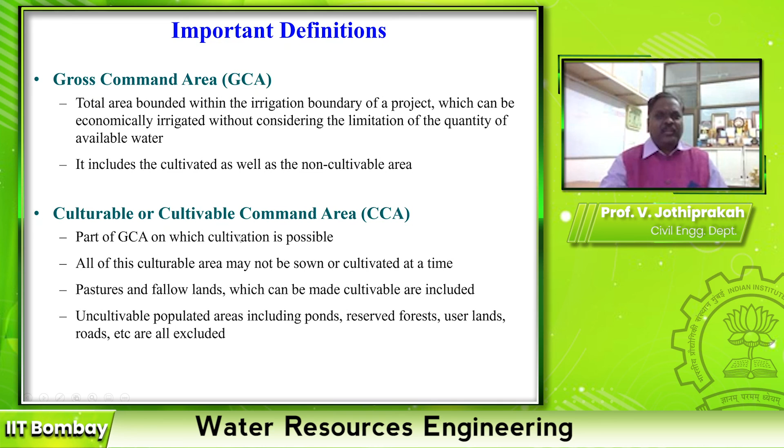Intensity of irrigation: due to some reasons, only a certain percentage of cultivable land is brought under irrigation, 30 to 40% will be irrigated every season. Sometimes there are certain large reservoirs where the irrigation intensity is 100%, that means all the cultivable command area is irrigated. If it irrigates in 2 seasons, then the percentage of irrigation intensity is 200%. Annual irrigation intensity is the sum of 2-3 seasons.

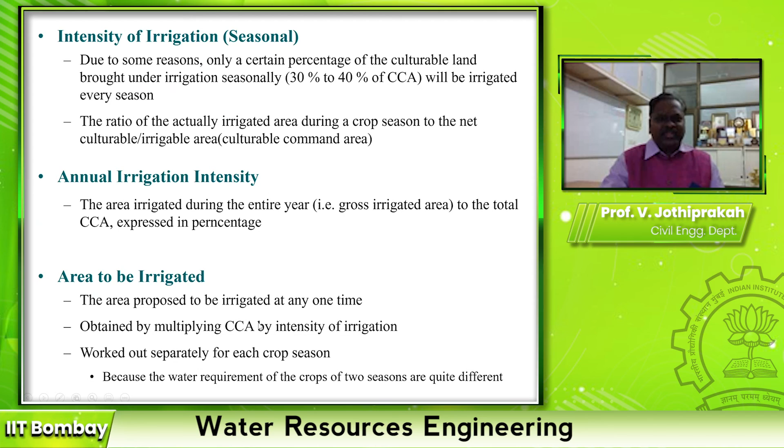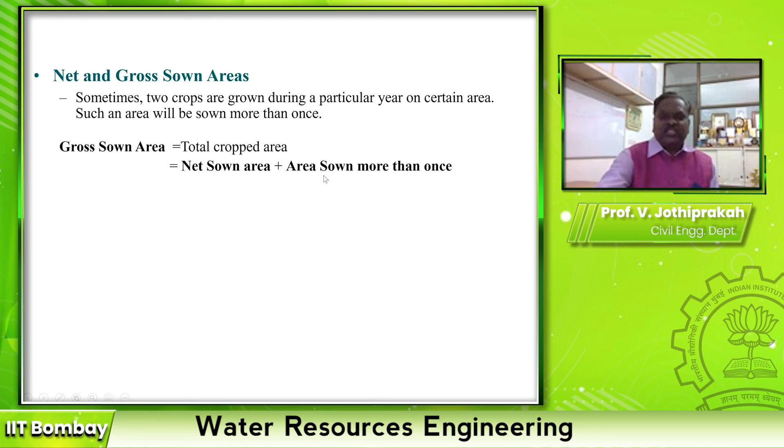Area to be irrigated is the area proposed to be irrigated at any one time, obtained by multiplying cultivable command area by intensity of irrigation. Net and gross area: sometimes two crops are grown during a particular year in certain area, such an area will be sown more than once. So gross sown area is equal to net sown area plus area sown more than once. These are all some of the definitions you will come across when working in irrigation engineering.

Net and gross irrigated area: gross irrigated area is net irrigated area in a season plus area irrigated more than once during a year.

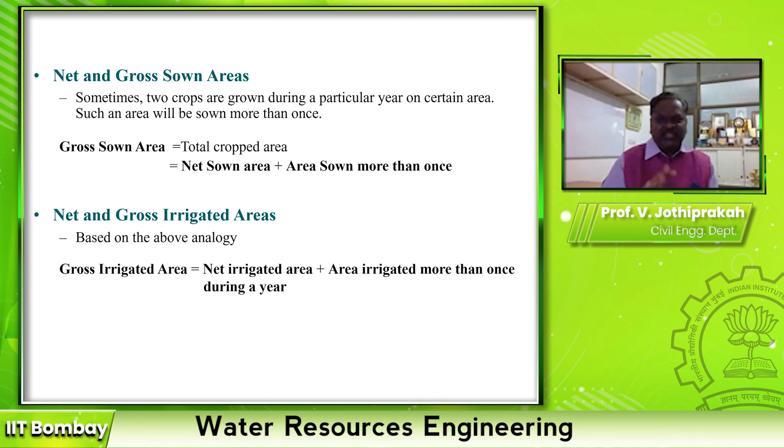Time factor is the ratio of the number of days the canal has actually to run to the base period in days. So even though the entire command area is under irrigation, I don't need to irrigate every day, but the canal has to be operated continuously because the command area is larger. That is called time factor.

Capacity factor is the ratio of mean supplied discharge to the full capacity of the discharge. During the starting of the season, we may not supply water to the full canal carrying capacity, which is estimated based on the full duty of the crop. But the discharge is gradually increased after the vegetative period, maturity period, then it is gradually reduced. That is called capacity factor. It will vary from 10%, 20%, 30%, then 100%, then reduces again to 10% and then stops.

The full supply coefficient is the area estimated to be irrigated during the base period to the designed full discharge during the peak. It's nothing but how efficiently you have used your water.

Nominal duty is the ratio of the area to be irrigated to the mean supply discharge during the base period. This is slightly different from duty, because a duty can be estimated for each and every crop, but in a command area there will be different types of crops, so which one do I have to consider? That is called nominal duty - the ratio of area to be irrigated to the mean supply discharge during the base period.